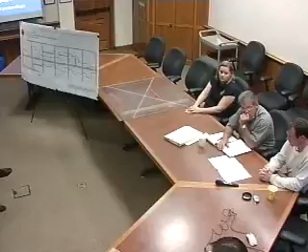I do want to add that no matter what the vote of the neighborhood, it is city council that has the ultimate authority to either approve or not approve, regardless of the vote. Just keep that in mind, because it could be a significant factor. We're trying to advocate neighborhood harmony, working with people who would like to have this project and those who may not be interested and may vote against it. It's important to us to keep neighborhood harmony and have good, healthy discussions, which is one reason we're having meetings like this today, to have an open forum for people to communicate.

Our job as staff is to be the facilitator of the process. Last year, in February 2008, City Council adopted the resolution to initiate the UUAD. Council again authorized hiring the assessment engineer, and the city is funding our startup costs.

Our process, or guide for steps in the process, can be found in an Underground Utility Assessment District packet available online. Here's the website — this recording of this meeting will also be found there, at www.santabarbaraca.gov, under government departments and the Public Works and Engineering web pages, where you'll find both the packet and information regarding underground utility assessment districts. It also has the recording of the November 8th, 2008 meeting held in this building at the Gebhard Room, where we talked to property owners about neighborhood support thresholds.

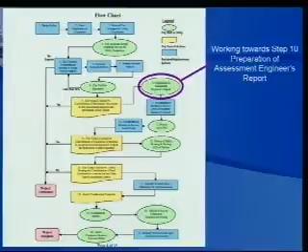So there are many steps in the process. Many of these are regulatory steps required by our municipal code or state regulations. And some of these are just good ideas, like the neighborhood meetings, communication forums, and noticing of projects. So it's a combination of requirements and procedural steps that we believe are prudent.

Once all costs are known, we would actually have the project bid and costs known before you would need to cast the final vote to determine if you are in favor or not in favor of the project. So know that there are many check-in points along the way where you'll have opportunity to ask questions and get information, but in the end, you will know that the known costs will be identified before the final vote comes to you.

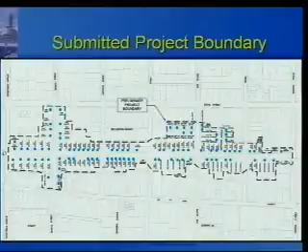So again, with regards to the team roles and responsibilities, with our council resolution, it's a city goal to assist neighborhoods in trying to achieve an undergrounding assessment district. We as staff are okay either way if a neighborhood decides to move forward or not. We're just facilitating the process.

So again, mentioning our startup costs, we're trying to provide that information in a timely manner, and I do want to apologize that it's taken us this long to get back to you. We had planned to get back to you in November and have this meeting around that time, but we had the Tea Fire, you may recall, and that drew our resources to the emergency and response to the Tea Fire. So this meeting has been delayed primarily because of that, and we strive to be responsive. If you have questions, we will try our best to be responsive and get information back to you in a timely way so you can make your decisions at the right time frames, and to also facilitate the neighborhood harmony I talked about.

The role of the assessment engineer is to determine the proportional benefit. Any property that receives what's deemed as a special benefit will be included in the assessment district. I showed you the map. If there are any other properties in the neighborhood that receive a special benefit, they will be included by the assessment engineer into the boundary.

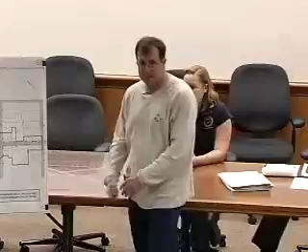We like to call those the existing wet utilities - water, sewer, and gas - because what we're trying to accomplish is cutting into a developed street with the dry utilities, the electricity, phone, and cable. So we need to know where we can go in a fully developed street. A surveyed map of this area takes quite a bit of money and time. The other thing we need, as John mentioned, are upfront engineering fees. These projects are traditionally very speculative - the vast majority never get off the ground due to the surveyed costs and all the other costs. So it's important that the utilities at least get some money for their time and effort just to come up with a preliminary design.

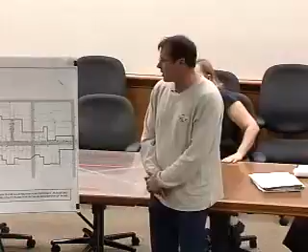As far as getting to this point, which is where we're at, this is all very preliminary.

Edison is first to design the undergrounding system because we are the highest voltage of the three utilities. We are required to go deeper than phone and cable, so as much as possible to reduce cost, phone and cable will be on top of us in a common trench. Edison will be at the bottom, with a typical requirement of 12 inches of vertical separation between Edison and the other two utilities. Then they have their own minimum depth requirements as well.

The depth of the total trench depends upon what we have to put in it. We might have to put in multiple conduits just for Edison, or Edison might get by with one or two conduits. Phone and cable might require multiple conduits as well, and that'll be determined in the final design. So here we are, Edison, the preliminary design.

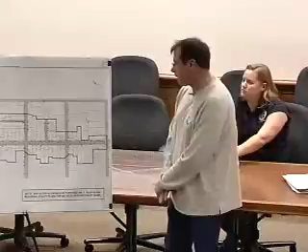We have to take the existing system and essentially bury it. We're trying to mirror or mimic what's already there. As you walk up Chapala Street, you'll see the lines on the eastern side of Chapala, or the mountain side, if you will.

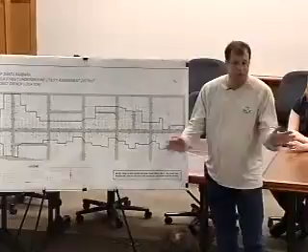One reason some of you might think it's very ugly is that there are a lot of power lines going up Chapala. This area is somewhat of a corridor between the lower State Street area and the upper State Street area. A couple of feeder lines go up Chapala Street that don't feed your neighborhood at all — one goes from Mission Street all the way to Constance and feeds another neighborhood. There's another line that goes up, I think, to Los Olivos and branches off to feed another area, and another line that comes across Los Olivos. So we have to design burying those as well as feeding your system underground.

After Los Olivos, it thins out a bit, and when you get closer to Constance, it's a fairly simple electrical system for Edison.

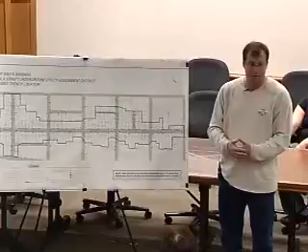As you walk up the street, we feed our customers with transformers that transform the high voltage into a workable voltage for everyone — some people call it 110 or 220, but that's what that equipment's for. There really is one transformer in every block. That's fairly common, depending on the size of homes and the load and the diversity of the neighborhood.

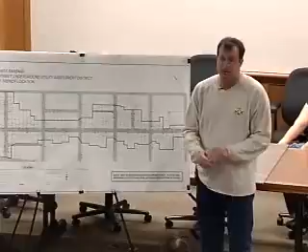In this particular neighborhood, because of the size of the homes and the diversity, we can get by with one transformer per block. There is one exception — I think there are two transformers between Padre Street and Los Olivos Street, and one transformer feeds American Avenue.

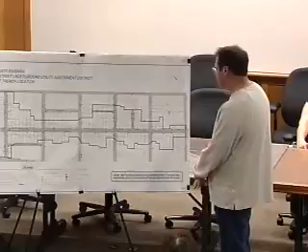So in order to underground this system, we have to take the overhead lines and put them in vaults, conduits, and substructures. Most of the main feeder lines that go through your neighborhood will be, as John mentioned, on the western side of Chapala.

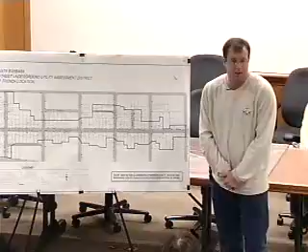We chose that location because it's the best place for us to go, quite frankly. The street is very busy, and you have gas and water on the other side of the street. There's also a main phone line on the south side of Chapala Street — you might see some of those manholes, marked GTE in the sidewalk on that side of the road. But there is enough room for us to put a trench probably 3 or 4 feet inside of the curb.

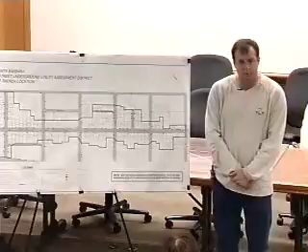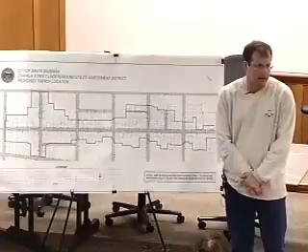From there, we will feed the vaults that go right up through Constance. We place the vaults every other block, as you see, because we can pull cable in a straight line — it's around 800 feet or so between the vaults — using the type of equipment needed to pull between those structures.

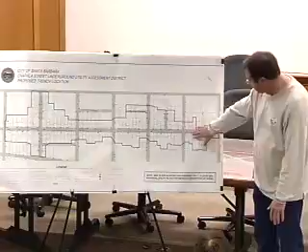Then, to feed your neighborhood, we come out of the main line trench into different transformers and smaller boxes, what we call splice boxes, which will probably be placed in the parkway on the west or south side of Chapala Street. We chose that side of the street because most of the homes on the north side of Chapala have retaining walls.

The homes on this side of Chapala Street are relatively flat. That's going to reduce your cost and reduce construction time significantly.

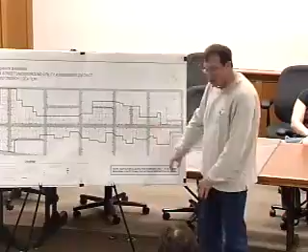After the transformers, we come out with secondary lines into two small boxes called handholds, about 1 by 2 feet or 1.5 by 2.5 feet in dimension. From there, we're able to provide a stub out or a cap to each property line. That's a requirement for us. So from that point, you will have the ability to pick up those conduits and take them to your house.

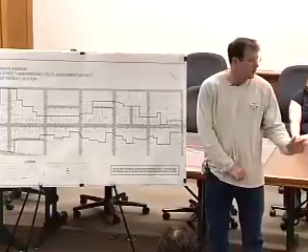John mentioned the costs associated with a project like this. We mentioned the startup costs, which will be absorbed into the price of the project if it goes through. The three utilities have their own costs: Edison, phone, and cable. You will also be responsible for the excavation of the substructure work. That will be bid out, and you'll get a price, again absorbed into the cost.

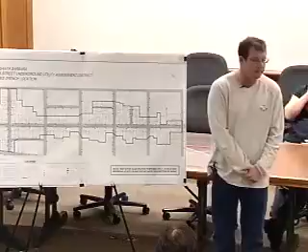The assessment only takes care of the mainline feeders and the caps. So once the assessment is done and the project is in, you as individual homeowners will be responsible for picking up that stub out or cap and digging a trench to your house, undergrounding your service lateral to the house. Typically you would convert an overhead fed panel into an underground fed panel, since the conduit comes from the bottom. That requires permits from the city, and they're committed to working with you on that. It's all very simple, but it needs to be included in your total cost for the project.

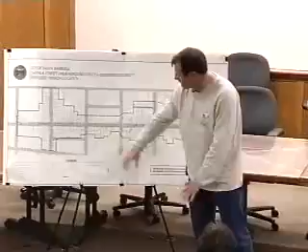I think that's it. We can get into more detail about the project itself and how we underground Las Rosas and Quinto and all of these, but that's a very basic general overview of where the project is at this point.

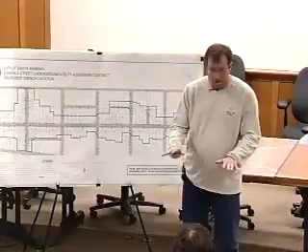Please keep in mind that all of the vaults, transformers, handholds and boxes shown are only for Edison. Once we come up with the final plan, Verizon and Cox will put in their substructures, and they will have boxes, typically next to ours. So that'll all be included when you get a final design. I don't want you thinking there's going to be one box in a certain location—there'll typically be three. Not always, but three.

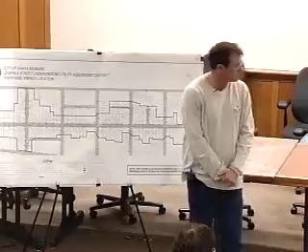Some people may be wondering whether any structures are going to be located on their property. You do have some indication of some of those structures. I don't want us to get into that level of detail right now, but at the conclusion of the presentation we'd entertain people coming up to ask questions about their own property, to see if there are possible transformers or utility boxes being proposed for certain properties.

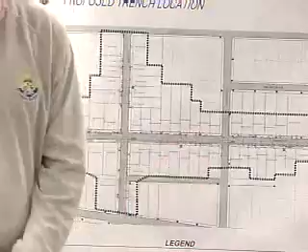Well, we can address that, John. That's a good point. Traditionally, Edison designs its system with the vaults in the street because they're very big structures—they wouldn't fit in any yard, and they're traffic rated. You see them all over the downtown area. The splice boxes and handholds will typically go in the parkway if there's a parkway in the street, which you do have. Pad mount transformers are typically installed right behind the property line, so in this case right behind the sidewalk. And as you can see, they're sort of centrally located in each block, again for a reduction of costs.

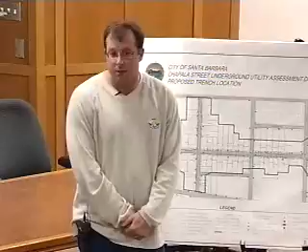Voltage concerns—we have to serve you a certain quality of voltage. So if we put the transformer in the center of the block, we can serve both ways and get good voltage for everybody. We can reduce our equipment that way, which again reduces your cost.

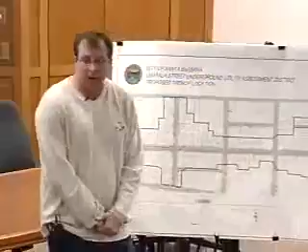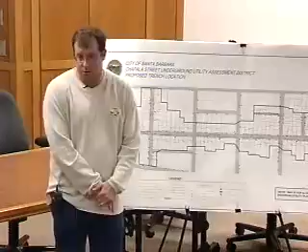The direction I got from the city, and I agree, is that we try to locate these transformers in an area where a person has voted for the project. So we didn't want to put it in a yard of someone who voted against the project initially. I'd be more than happy to meet anyone out there to discuss the location of the transformer and come up with options. It's something we have to do to provide you service. The overhead transformers that are there now are typically in the middle of the block too.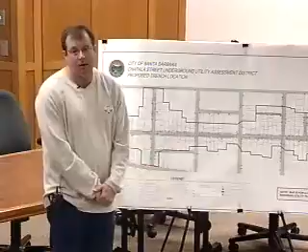Could you address how big the structure is for the transformers located behind sidewalks? Well, they're on a precast plastic or fiberglass concrete pad of about 48 by 54 inches, roughly 4 by 4.5 feet, and approximately 3.5 feet tall. Now the transformer itself is not 48 by 54—it's about a foot less than that dimension, and again about 3.5 feet tall. We can probably give the folks some pictures of those transformers.

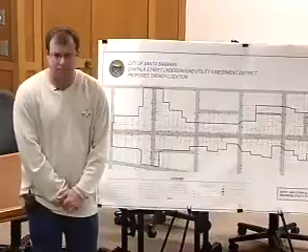I think one of the rather obvious questions that will likely be asked is cost. Project cost - I'll elaborate on it after the design presentation - there are two primary costs you'll face. One is the assessment cost for the project, and then anyone who doesn't have their service lines to their house undergrounded will be required to underground that.

The assessment cost is a distribution of the cost amongst all those in the district for the undergrounding of the main line in the street, the removal of the poles, the distribution system in the public right-of-way. So that's the assessment cost portion.

Then there's the private property cost portion, which is anyone who currently doesn't have their utility service lines from the street to their house undergrounded. That is a sole private property owner expense. That may be concerning to people, and I'd like to bring you some good news later in my presentation about a loan program I'm proposing for that. So there's two types of costs: the assessment cost and the private property cost to underground.

We'll give you some ballpark estimates of that. Going back to this project and the design, we'll be fortunate to have another city project go to bid soon to help us with cost estimating for this project. This project is about 6 blocks.

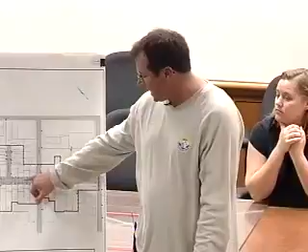Well, with that, I walked the street several times, and I've tried to find the existing meter panel locations on each of your homes. So when I designed the stub out, I tried to cap it at the same side of the property that your existing meter panel is on.

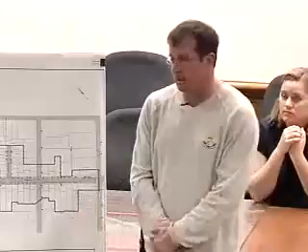As Jim mentioned, it doesn't have to be that way. If you do any work on your house, you can move your meter panel, and it would simply mean moving the stub out to where you want it. This map is very diagrammatic - it's not the Edison plan that I generated. It's a good illustration and very helpful, but the project would be laid out based upon actual utility maps.

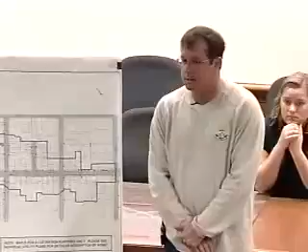So we can look at that on an individual basis, that's not a problem. I would like to say, Jim, that not every house has a box in front of your property. There are a couple instances where the box is in front of the neighbor's property in the parkway, and then we went along the parkway 50 or 60 feet and then turned into your property. Again, we want to maximize the use of these structures to reduce the cost and maintenance of the system.

Okay, do you have any questions about any of your individual properties, or anything in general?

I did want to give you an indication of what you can expect for undergrounding your service utility lines. We've hired a contractor who looked at your neighborhood and determined small, medium, and large categories, with ranges of approximately $4,000 to $7,000. That's consistent with what we've been told by others in the city who have accomplished this, when we've had public meetings and they've told us their costs.

Now, undergrounding your service line could possibly be the biggest out-of-pocket expense you could incur on this project, because the assessment component can be financed over a 20 to 30-year period through the city's financing program. So that $4,000 to $7,000 could possibly be your biggest expense.

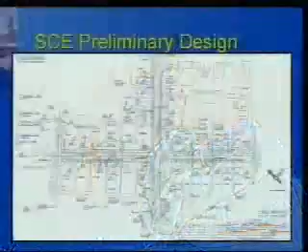This was a copy of the plan you see in front of you. We thought that was a little busy, so here are more details of each of the lots. If anyone's interested, we can come back to these and leave them up on the screen, and go look at your lots individually.

For members of the public viewing this online, we also offer that they contact Jim Britch and Tom Wagner to set up times for anyone to have their lots and issues looked at. We can have individual meetings, or we prefer group meetings if possible, just to minimize duplication and time, but we'd be happy to meet with people about their individual properties.

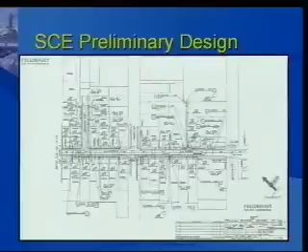So these plans are all available online? This presentation will be made available online, with detailed lines. We'll actually be able to put these plans online too, I expect. I could PDF them. Yeah, we'll put them online as well, so people can have a look and perhaps enlarge them and look at their lots.

And if they have specific questions, they can be directed to Mr. Britch or Mr. Wagner as appropriate. Can we get a hold of you guys electronically? Sure, we'll be able to provide them electronically. Is that okay, Tom? We had something to shoot off to you. Sure, so rather than arrange a meeting, we'll make that available for those who would like to see them. Again, we'll publish them online so you can print them yourself.

With that, if there's a lot of questions, a lot of concerns, we might get together and have another meeting with the people who want to meet with us, rather than try to address 125 different opinions separately. It would be a better design.

You're going to absorb this meeting and have some questions after. Your mic, Tom, your mic.

Just to reiterate what Mr. Wagner is saying, we would be able to try and group discussions if possible. For example, next time we meet on the assessment engineer's report, I think we could reserve some time or add to the agenda for anybody who'd like to talk about their preliminary design. We can also take advantage of a group meeting for further discussions. So this isn't the only time you'll have an opportunity to comment on some of the design.

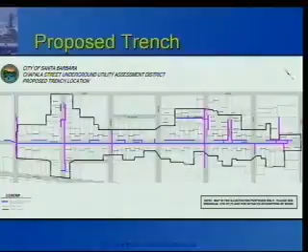I think what we're seeing is that because the design involved a lot more detail than was known when the initial boundaries were drawn, we'll be talking with other property owners as these issues evolve, and we'll likely have another meeting to find which pole will remain standing. Tom's made his design based primarily on their operational needs, knowing the project boundaries. So the end pole issue is subject to change, and as much neighborhood input as we can get at this early stage will be beneficial to determining where exactly the end poles will be.

We're not only talking about Chapala Street, but the streets that come off of Chapala Street, and there has to be a terminus on every street of where the undergrounding stops. Those are somewhat fine details, and we'll work with property owners as appropriate to make those determinations. We'll bring it back to the group to let people know what the key issues are and what decisions will need to be made.

If it's a decision that impacts a significant amount of people, we're going to be talking about it openly. But if it's an issue of whose property a box goes on, we're probably going to talk to individual property owners, since it wouldn't be necessary to involve a larger group for those types of issues. The devil is in the details for the design, but we have a very good team to address those issues. So we offer that if you have individual questions, it's a very good time for property owners to be talking to us.